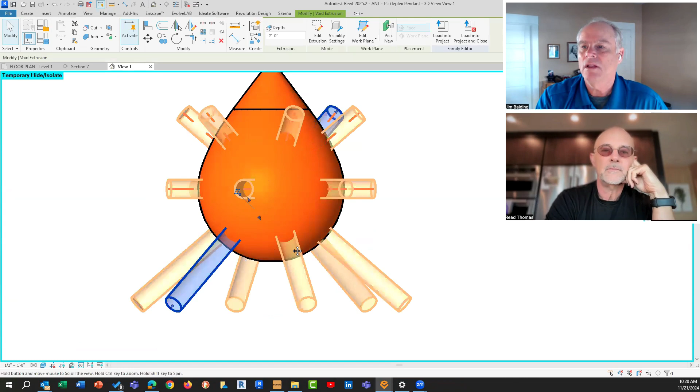Now here I am trying to - let me turn that off. There you go - so this light actually renders as a fixture, but then if you click on it, you can see the voids. Gotcha - so those are a void family.

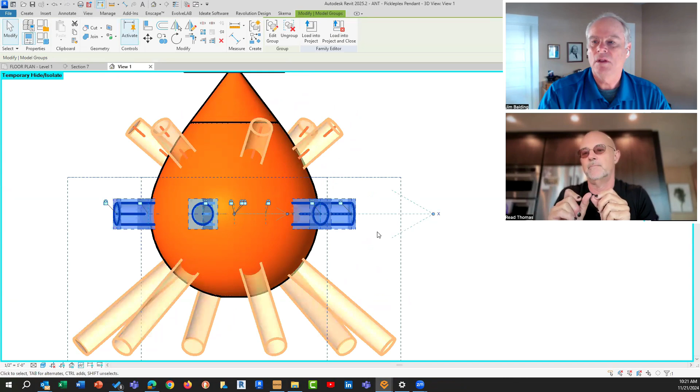When I tried to make them go all the way through and then rotate them, I couldn't control them. So I had them go to the midpoint and then have two of them. Then I could array them and rotate them and get them to go through the sphere the way I wanted. Doing it twice didn't work the same way - you just used half of it, went one direction or the other. Let's go to 3D and hide that.

So you can see that that's a group that I arrayed. Actually, I had a group and a master group. So I had one group that I arrayed them around, then another one that I could rotate them on axis and then rotate that around. That took a long time to figure out. It probably took me 3 or 4 hours to get that technique.

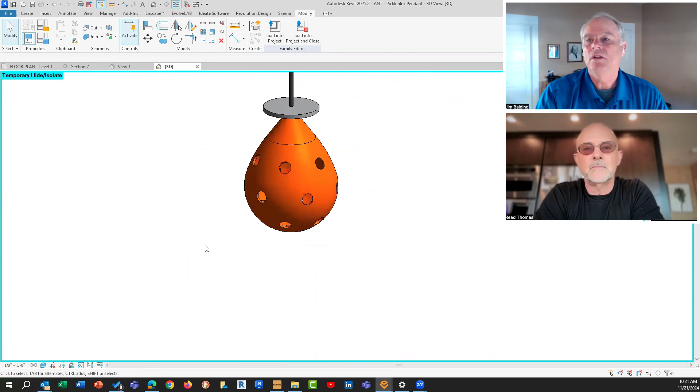But I'm sharing it now. But now you're designing lamps. Yeah, I mean, yeah, well.

Yeah, so when you need these patterns, sometimes they're materials or you can use geometry, but you try to do it as efficiently as possible. And speaking of efficiency, you have this technique, and we've always talked about this idea that you don't have to model something perfectly to get it in the project. So in this area, there's a smoothie machine, and it's evolved over time.

The reason this caught my eye is if you've ever seen these ice smoothie machines, like in a bar or a cafe, when they spin, the icy slushy material winds up to one side and then it slopes. And I thought, if you're going to show smoothie material in the machine, don't just model it flat. You went to the detail of actually giving it that texture. But it wasn't always this.

No, no. So I'm going to share that. Maybe I should have opened that up earlier. Here we are live. Let's see. This is so evolved. So I'll share this one.

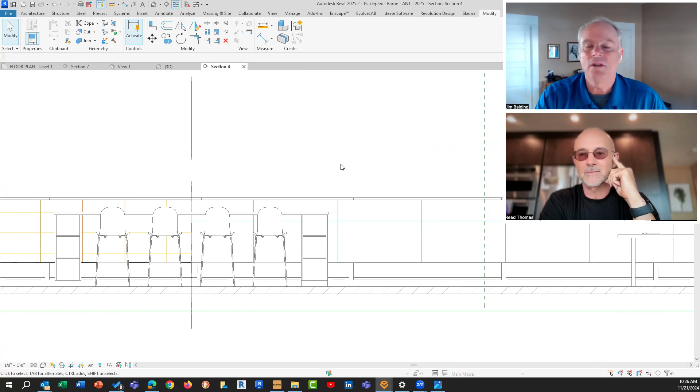You can't do this with a family, because with the family you'd have to do it in the family editor. You can't do it live in the project. Oh, you can't move the origin around of the image. Yeah, you'd have to go back to the family. So you just make it a wall and then you can move the origin in the moment.

Yeah, so this is the Ant. I didn't have enough sponsors, so I put in Ant Pickleball. We got a new company. So there's Ant Pickleball, and I'm going to overlay this, and then I'm going to tab till I get that line, and I'm going to move it. Let's just say move it 2 feet, and then Ant Pickleball moved 2 feet. Nice. And I'm done.

I found myself nudging these items around till it looked right, and then carried on. It's kind of subjective. That's great. So some of them worked out, some didn't. And as walls, you mentioned that you can just swap out walls. Yeah. So as opposed to using drafting or using the paint tool or doing a decal, and then you have to tab through and move decals around or remove them and add a new one.

By making it a wall, you can just swap out walls, and the walls have different materials associated with them. So I can make that Save My Play. Boom, Save My Play. Now you can see that it came in a different origin, it's off kilter. So I had to just move it up a little bit till it looked right and be done. These all worked out to within a 1 foot increment. So I move it 1 foot. No, not enough. Another foot, and boom, done.

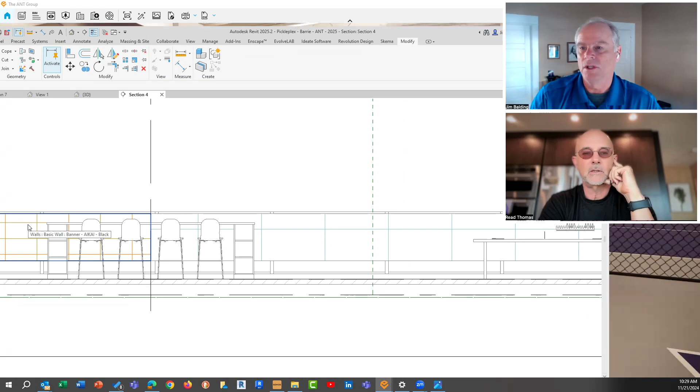So there's the AIKAI one. It's orange. Their logo has orange in it. Mine has blue in it, and then just different sizes. And for some of the smaller logos, I put a smaller pattern in so that I could just snap pattern to pattern and be done.

Does that light pattern even show up when you print? It would, but if it's CDs, construction documents, I would filter those wall types off. I wouldn't show them. They're not going to show on a construction document. That's a banner, right? So you just run a filter and turn that off. Oh, as a component type, yeah, just filter for the job.

Because that's more like putting a painting in a residence. You don't put paintings in the drawings. You put them in the presentation, but you don't put them in the drawings. And use filters to turn that stuff off when you're printing your construction set.

So the other custom thing that you did was, well, I mean, it's full of custom stuff, but the material for the wallpaper. Ah, okay, that's a fun one. So let's go to right over here.

So the client wanted this wall to be just gray. And for whatever reason, I said, okay, fine. So we did a gray. But in my contract with them, or my proposal with them, I said, look, I've reduced my fee from giving you black and white to giving you full color and haven't changed the fee, but I get to do whatever hell I want with the model when we're done. And they said, sure, that saves us money.

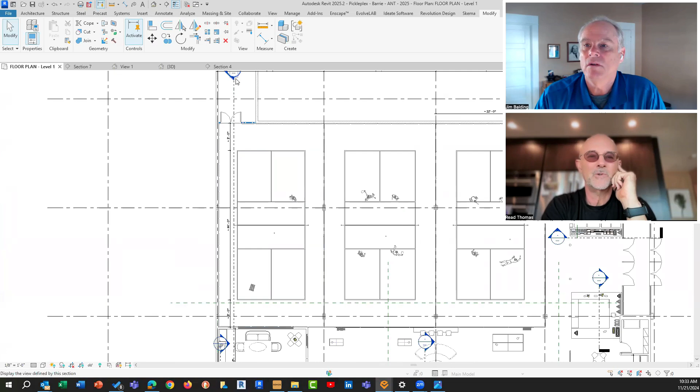I'm going to bring you back over to Revit and show you that that's this wall right here. And so it's this object. Oh, you can see the pattern from my material, for the wallpaper. Yeah. So you can see this, and I could open this family up. But before I do that, I can say in here, it says show light or don't show light. And I can turn that off.

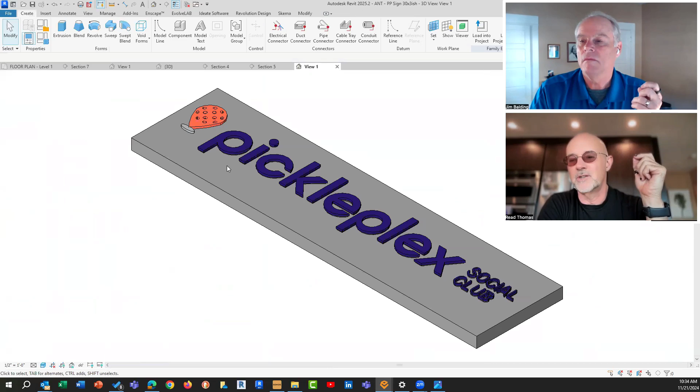And you can see that there was a double line there, turning it on. That double line, that's actually a physical object behind the letters. So the letters have a thickness. We're looking at a wireframe view. Okay. So let's just open that up. And why would you have a parameter to control the illumination? What's the advantage there? Because there's times when I don't want that to be an illuminated sign. It's just a regular sign. And so I didn't want two families. Okay, gotcha.

And the parameter is on and off. So this object, its visibility is controlled by show light. I could name it whatever I want, show light. So if you uncheck that, it turns off the geometry, which then turns off the illumination.

You're using illumination in the project or in the family to control the light. It's not a light object in Revit. No, it's geometry with a material. So the material that I call, and I use it on a bunch of stuff, is ant LED light. That's a self-illuminating material. But if I turn off the physical object, the light turns off, because the object's not there.

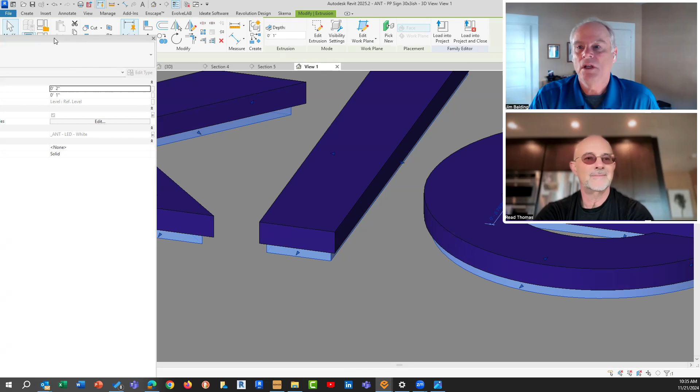Yep. And then of course I can change the offset from how far it is off the wall, et cetera. And so we can control those things. Did you want to go any further into that? No, I think that's the thing. Illumination is not always a result of having to put light objects in Revit into something. Sometimes just having geometry with illumination gives you the effect without the complexity. Like if you had to model individual lights, it would just be a pain.

There's lots of situations in your projects where you have kind of recessed illumination. You don't want to go through all the complexity of placing light objects into things. And if it's signage and you put lights in it, then you got to do something complex to make it a light. This doesn't schedule as a light. I've done this to make it look like LED or neon. And you did it in your sample, right? Yeah, my sample has the geometry approach.

So self-illumination is what creates it, just click that button, and then I had to tinker with what worked the best with these numbers, and I did a custom, between 50,000 and 100,000, and of course I can change that wherever, but then it lights up the wall. So if I click that, I'm going to change the properties and turn it off, and see what it looks like without the illumination. And it's just a checkbox.

Ooh, it's not working. Sometimes Enscape's going to have to see the change. I'm still illuminated. Did you click it in Revit? We're doing it live. Oh, I was looking at the wrong one. This is the one we're looking at. So there it is. It's turned off. There you go.